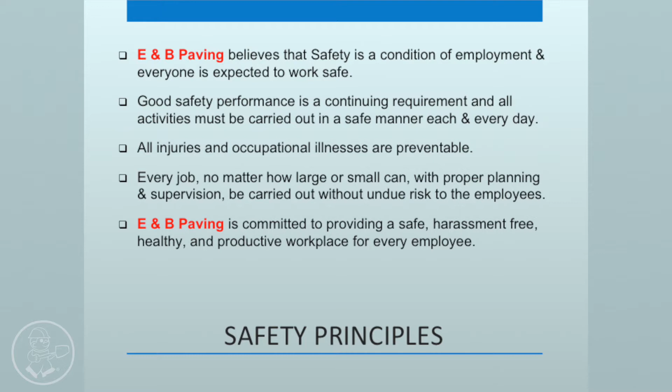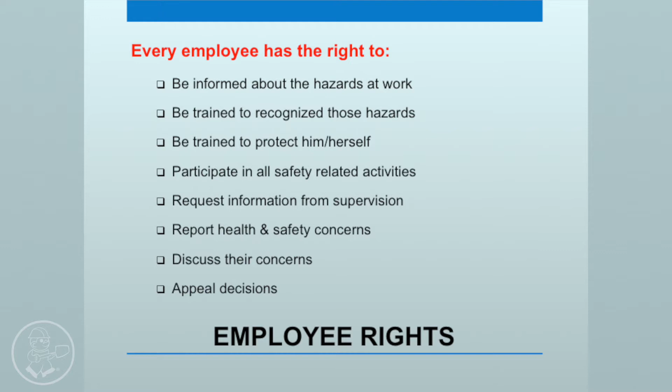We believe that safety is a condition of employment and that everyone has a role to play in providing a safe, harassment-free, healthy, and productive workplace. We have a disciplinary program that includes verbal warnings up to and including termination of employment. All employees have the right to be informed of hazards in their workplace, participate in all safety-related activities, request information, report concerns, discuss those concerns, and appeal decisions of management.

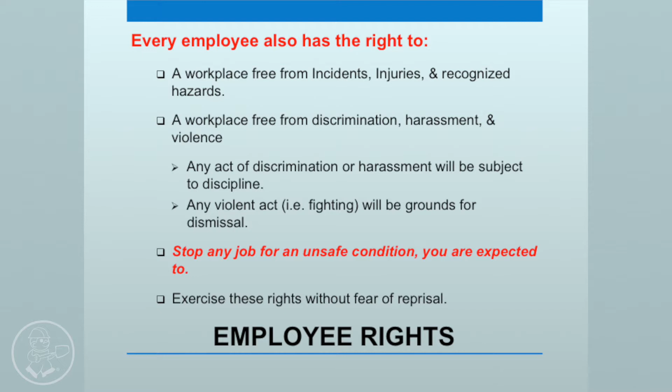E&B Paving has a zero tolerance for discrimination, harassment, and violence within our organization. Each and every employee has the right to report any violations without fear of reprisal. All employees have the right to stop any task that they feel is unsafe to themselves or others. Employees have the responsibility not only for their own safety, but that of their coworkers and the public. All employees are expected to report unsafe conditions or hazards and to report all work-related injuries when they occur, regardless of severity. If an employee is unsure of how to perform a task safely, stop and ask questions.

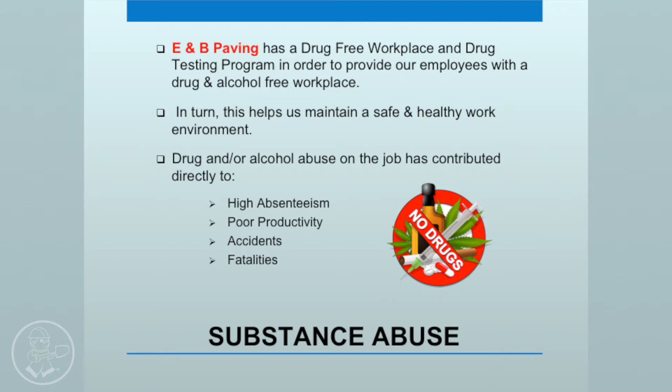We at E&B are committed to providing a drug-free workplace. Drugs and/or alcohol abuse directly correlates to higher absenteeism, poor productivity, incidents, and fatalities. Our drug-free workplace and drug testing policy prohibits any employee from reporting to work under the influence of drugs or alcohol. Our drug testing policy includes testing for the following: pre-employment testing, reasonable suspicion testing, post-incident testing, and random testing.

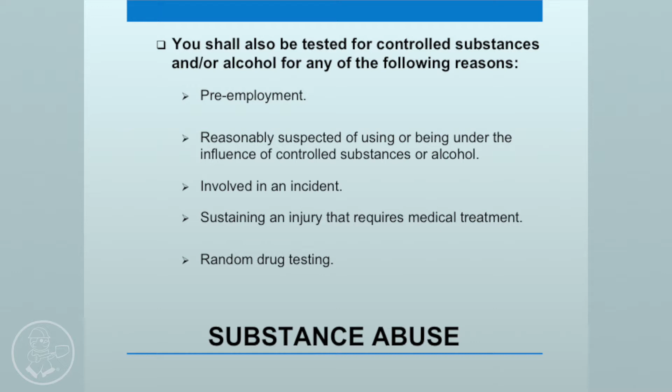Employees who possess specialty training certifications such as CCO, First Aid and CPR, OSHA 10 or 30-hour, Flagger, along with any other required training should provide the company with copies of such certifications for the company records. Toolbox talks will be done on a weekly basis and documented by the foreman. E&B Paving requires that any employee performing flagging operations have a valid flagger certification from either the union or ATSSA, and that a copy of their card be on file with the safety department.

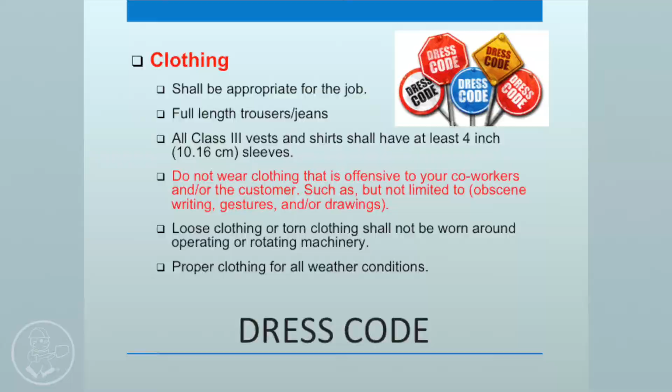We expect our employees to report to work dressed in a professional manner. This includes wearing full-length pants, shirts with a minimum of 4-inch sleeve, leather work boots, and no offensive material on their clothing. We provide employees with all the necessary personal protective equipment, or PPE, for the tasks they are asked to perform. We expect all employees to use the proper PPE for the task and ask for the PPE if they don't have it. ANSI-approved hard hats are required at all times.

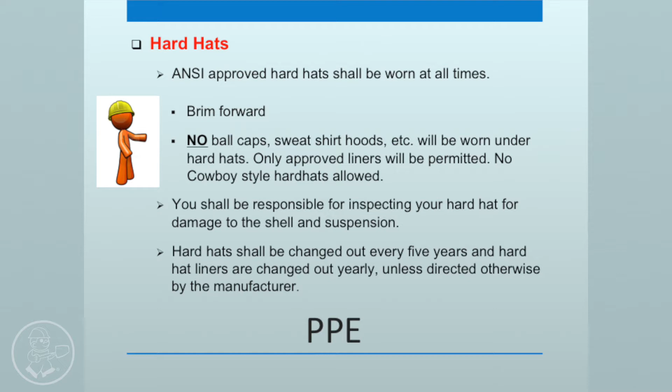Hard hats must be worn brim forward. Hard hats should be inspected for damage and replaced at least every 5 years. The suspension should be inspected for damage and replaced at least every 12 months.

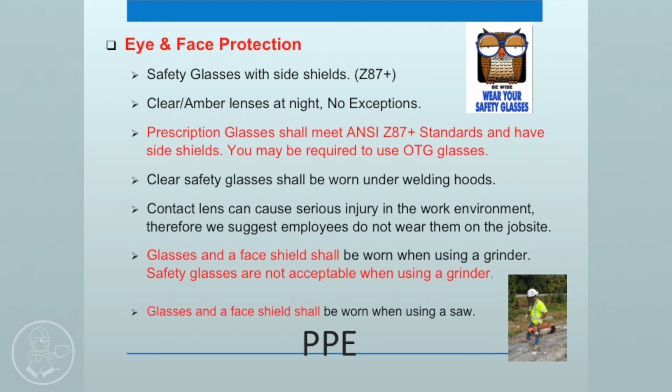Z87 safety glasses are required at all times. Prescription safety glasses must have the Z87 stamp in them and must have side shields. Clear or amber lenses shall only be worn at night. Clear safety glasses shall be worn under welding hoods. When performing tasks that produce flying debris, a face shield must be worn in addition to your safety glasses.

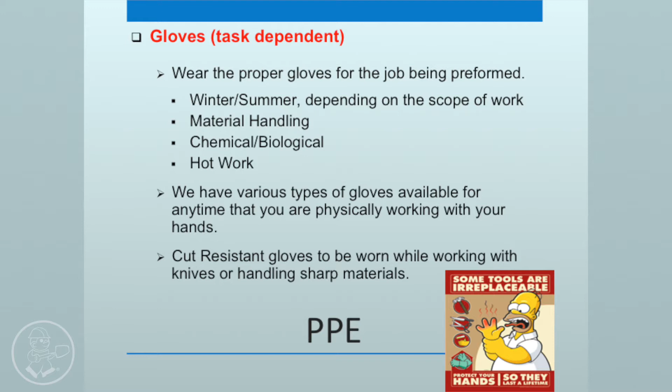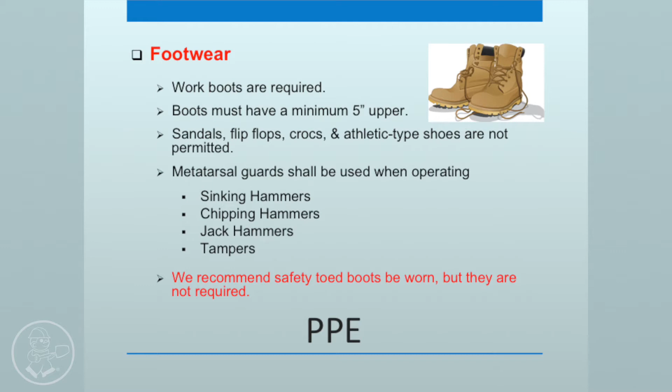Proper gloves should be worn to protect your hands from hazards associated with the task being performed. This could include cut resistance, chemical resistance, and/or leather gloves. Work boots with a minimum 5-inch upper are required at all times. We recommend safety-toed boots be worn but are not required. When operating equipment that could hit their feet, employees are required to have metatarsal guards if their boots are not safety-toed.

ANSI Class 3 safety vests shall be worn at all times. All vests must be zipped to provide the 360-degree amount of reflectivity. Class 3 clothing may be worn in lieu of a safety vest. All vests and/or clothing must be washed or replaced if it becomes soiled or the reflectivity becomes compromised.

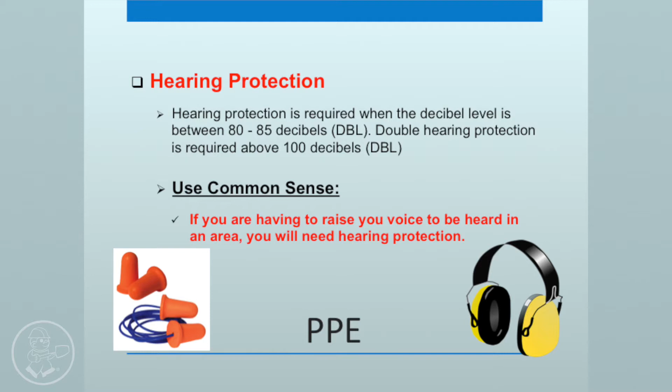Hearing protection is required when the decibel level is between 80 and 85 decibels, and double hearing protection is required above 100 decibels. Only employees who have been medically released by a licensed healthcare professional, have proper training, and have been fit tested will be issued a respirator for activities where air quality cannot be improved by other means. Examples may include lead, asbestos, and silica.

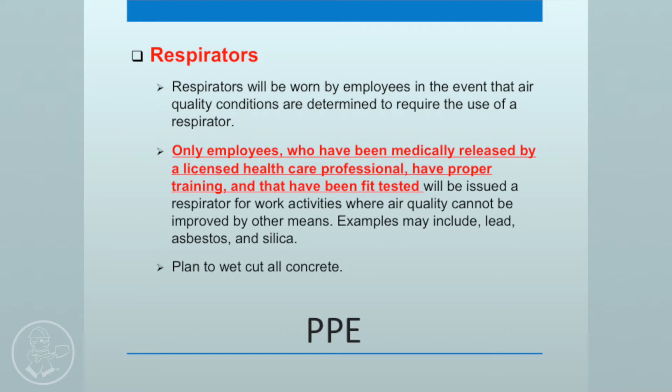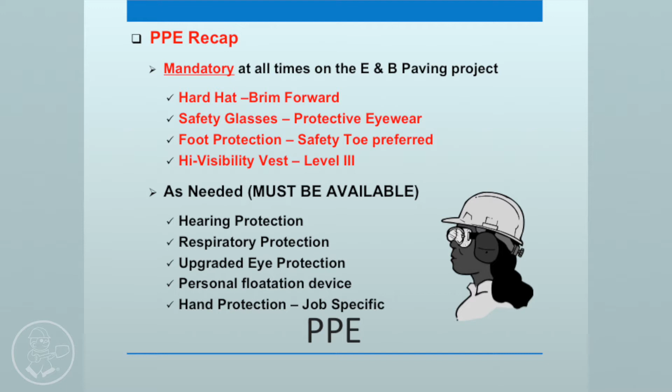Now let's take a moment to do a PPE recap. Mandatory items can include a hard hat, safety glasses, foot protection, and Class 3 visibility. Other items that may be needed could include hearing protection, upgraded eye protection, respiratory protection, and hand protection.

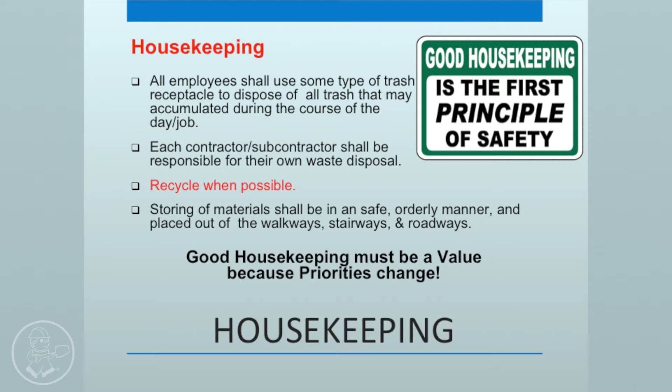It is the responsibility of all employees to help with housekeeping on all of our jobs. Poor housekeeping not only reflects negatively on the professionalism of our company and your crew, but poses a safety hazard to everyone on the project.

All employees should be aware of the slip, trip, and fall hazards around them. Do not carry loads you cannot see over. Keep walking and working surfaces free of debris and slippery substances.

3 points of contact should be used when getting onto or off of equipment. In addition, the employee must face the equipment when mounting or dismounting. All exposed rebar and form pins should be capped at all times.

Employees must be cautious when working around heavy equipment and/or materials to avoid pinch points for their hands and crush points for their bodies. Always be aware of your surroundings and take extra caution not to get between a piece of equipment and a fixed point where you could be caught in or between.

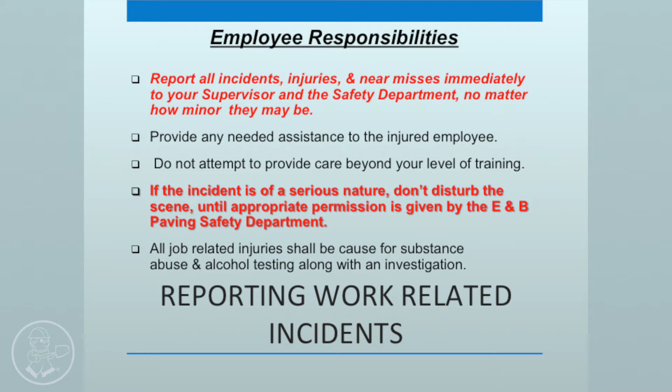Employees are required to report all incidents, injuries, and near misses to their supervisor immediately. It does not matter how minor it may be, or whether the injury requires medical treatment or not. Everything must be reported. If a serious incident occurs, every effort should be made to maintain the scene until documented by the safety department.

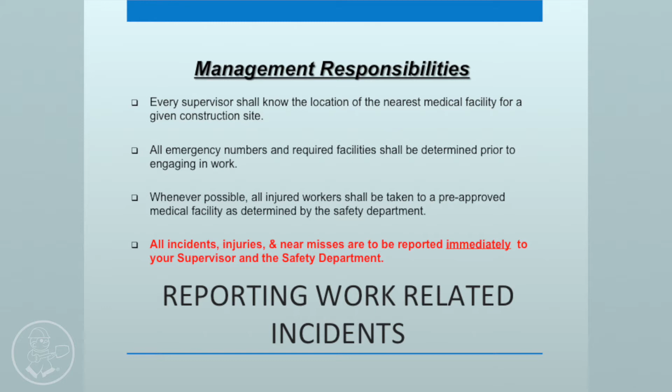All foremen and supervisors shall know the location of the nearest medical facility. Emergency numbers shall be posted on the job site bulletin boards. Unless it is a life or death situation, all injured workers must be treated at a company-approved medical facility. All incidents, injuries, and near misses are to be reported immediately to your supervisor and the safety department.

Pre-job briefings, which could include a job hazard analysis, toolbox talk, or safety huddle, will be conducted by the foreman or supervisor. All employees are required to attend, and participation is key. Foremen and supervisors should use the daily pre-job briefing to discuss the scope of work for the day, identify the known hazards, and what actions or tools should be used to mitigate those hazards.

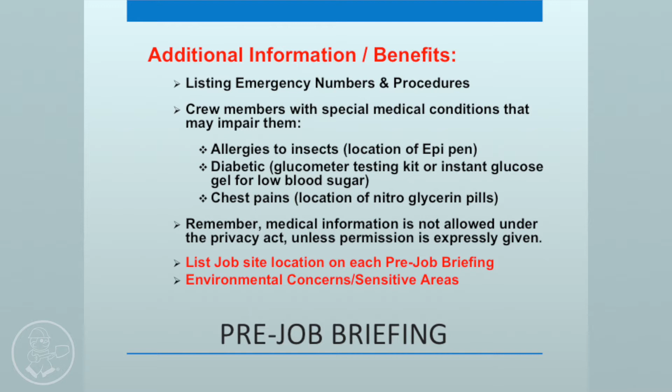Any employee with a medical condition that may incapacitate them and require immediate treatment during their shift, which could include allergies, diabetes, or heart condition, should consider making sure that at least one member of their crew is aware of the condition and the location of any immediate treatment options, which could include an EpiPen, blood sugar testing kit, or nitroglycerin pills.

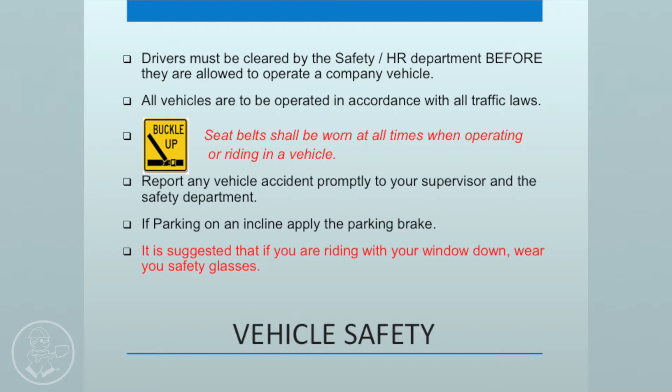Before an employee is allowed to drive any company vehicle, he or she must be cleared by the Human Resources Department. Seatbelt use is required at all times when operating or riding in a vehicle. First aid kits and fire extinguishers shall be available in all foreman's vehicles. Drivers should verify that all loads are secure prior to moving the vehicle.

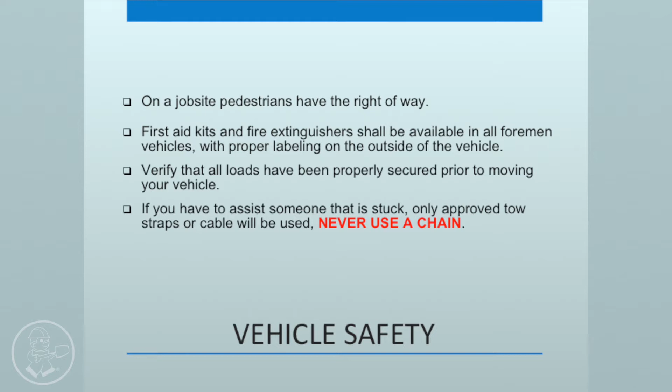Median crossovers are only to be used when both inside lanes are closed to traffic. All vehicles on the job site must have working strobe lights.

Use of cell phones for personal reasons is prohibited while working. Hands-free cell phone use while driving is allowed, and no personal listening devices, such as radios or MP3 players, are allowed while working.

The use of portable electronics for personal reasons is strictly prohibited while actively flagging. Communications with flaggers during active operations should be kept to a minimum and should be related to work activities.

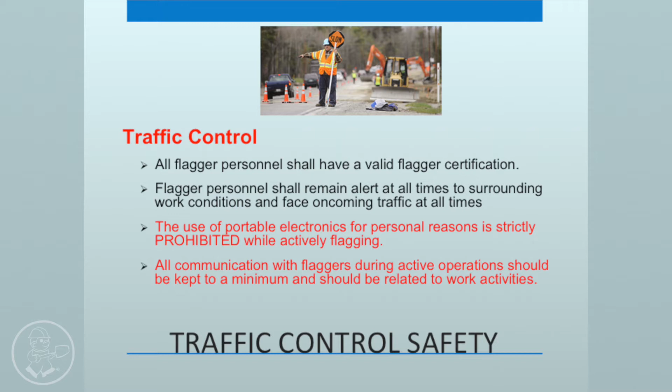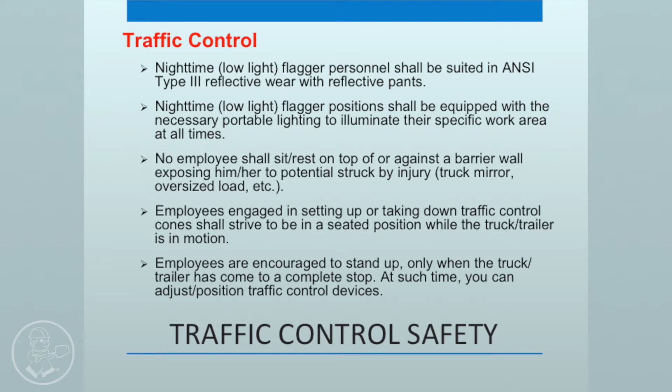For all night work, if not behind a barrier wall, ANSI Type 3 pants or gaiters must be worn by all employees. In addition, reflective tape must be on all hard hats. Employees are not allowed to sit or rest on top of or against a barrier wall while next to live traffic.

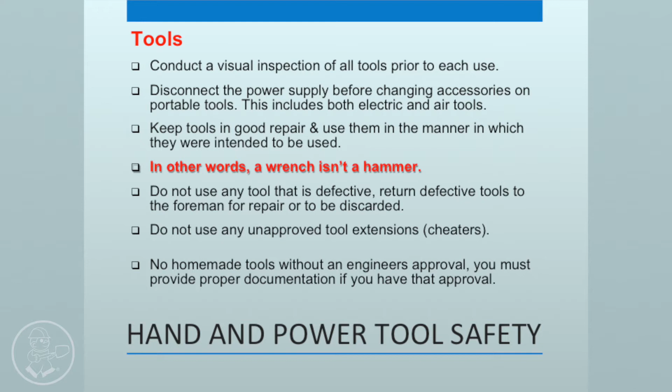All hand and power tools must be inspected before use. If defective, they must be repaired before they are used again. If immediate repair is not possible, they must be tagged out of service until repair can be made. When working above walking and working surfaces, all tools should be in a holder or secured from displacement.

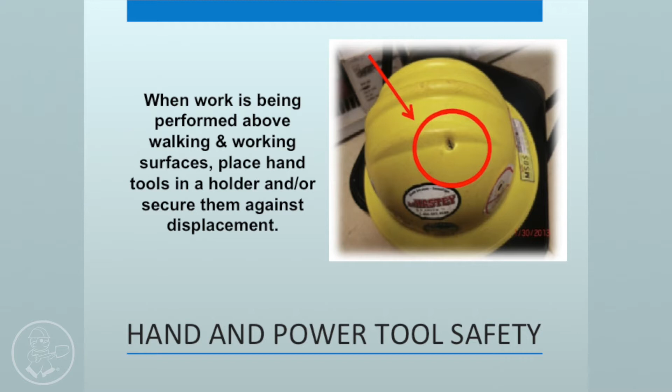Guards should never be removed from power tools. If you find a power tool without a guard, tag it out of service and report it to your foreman. Remember, you must always wear the proper PPE for the tool you are using. Any employee using a grinder must have a face shield in addition to their safety glasses.

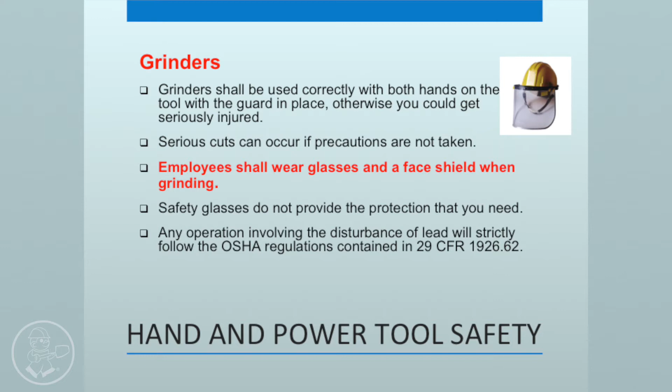Fall protection is required when working at a height of 6 feet or more, or 4 feet at fixed plant locations. Guardrail systems should be used when possible to mitigate the fall hazard. When a guardrail system isn't feasible, employees must use 100% fall arrest systems.

This shall consist of a full body harness, retractable fall limiter, and an anchor point rated for 5,000 pounds per person. If using a standard lanyard, you must consider the total fall distance, including the height of the employee, the deceleration distance of the lanyard, and a 3-foot safety factor. The use of retractable fall limiters is preferred.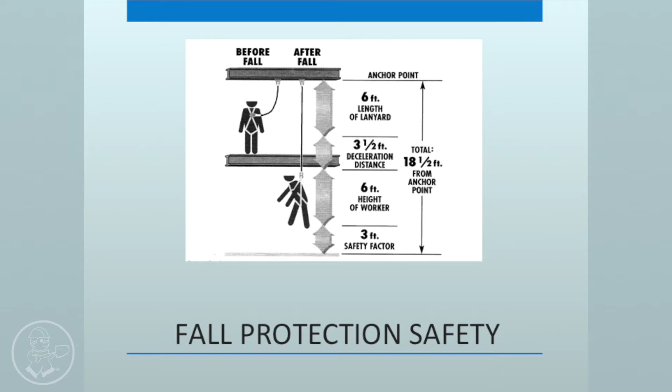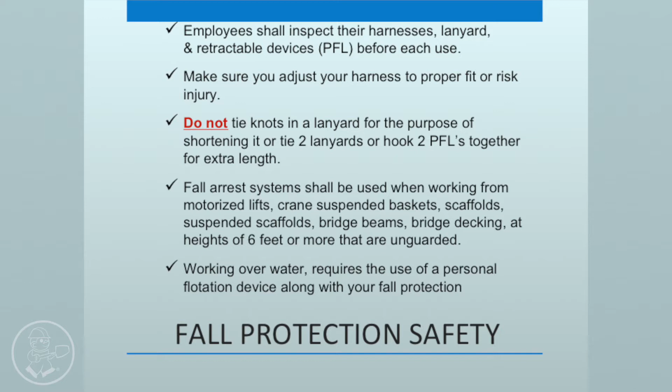All personal fall arrest systems must be inspected by the employee before use. All harnesses should be adjusted for proper fit. Employees must have 100% fall protection at all times.

Motorized equipment should be used as a last resort. When used in this manner, the engine should be turned off, the parking brake set, and the key should be in the possession of the employee using the equipment as an anchor point.

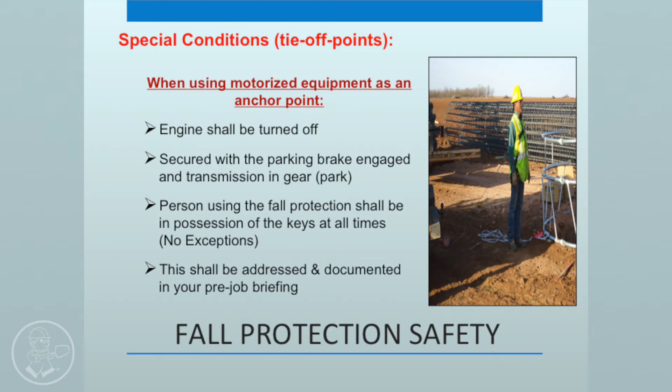An employee required to enter a confined space or act as an attendant for a confined space entry must be trained in confined space entry before they are allowed to perform the task. For confined space requiring a permit, the permit is only valid until the end of that shift, and it must be replaced with a new permit each shift.

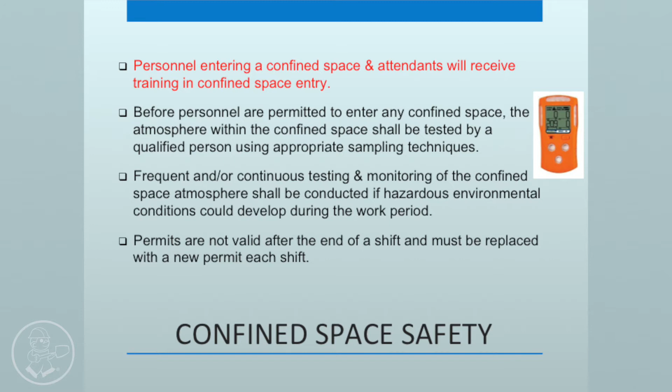Testing of the air quality in a confined space must be performed before entry, after lunch period and after an extended period of being out of the confined space. Attendants are to perform no other tasks. Warning signs or devices shall be posted to keep unauthorized personnel out.

For all excavation activities of 5 feet or more, a competent person must be on site. All hazards associated with the excavation must be covered on the pre-job briefing with all employees who could be exposed to the hazards. All spoil piles must be kept at least 2 feet from the edge.

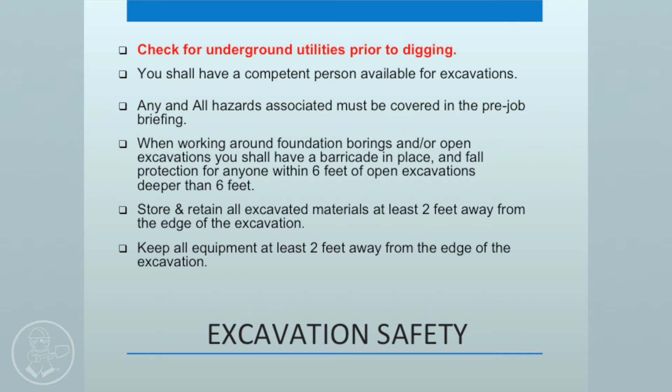Any excavation 20 feet or more must be designed by a professional engineer. Some type of protection system, which could include benching, sloping, shoring, or trench boxes, are required for all excavations 5 feet or greater. All excavations must be kept free from water.

Safe means of ingress and egress, which could include a ladder or steps, is required for all excavations over 4 feet and must be provided every 25 feet. Barricades, warning lights, shall be placed around unattended excavations.

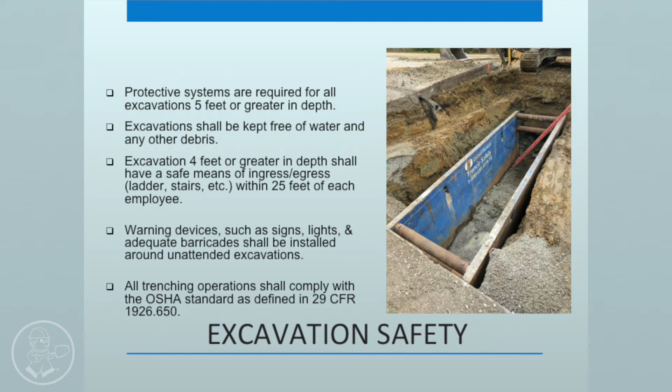All ladders must be inspected before use. Always use 3 points of contact on a ladder. All straight or extension ladders must have safety feet and be secured when in use. Never use a step ladder as a straight ladder.

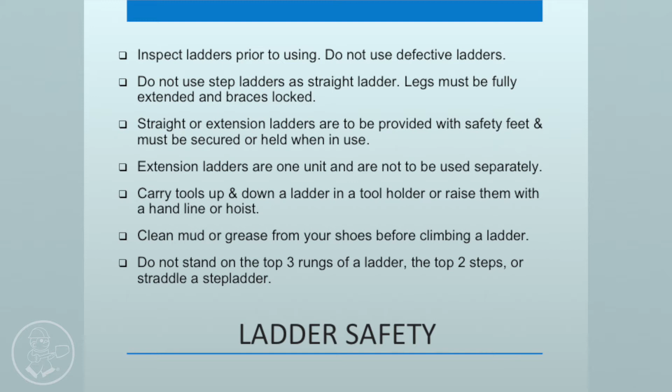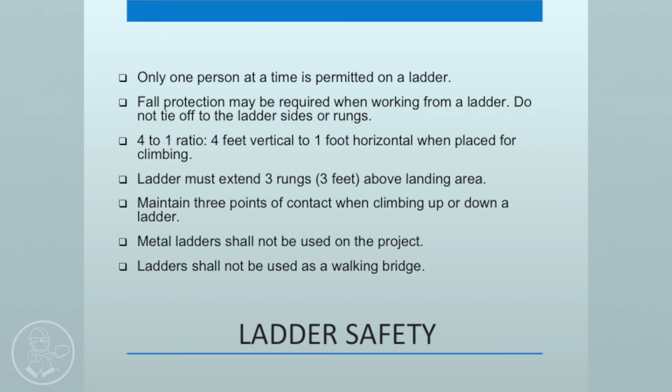All step ladders must have legs fully extended and braces in the locked position. Only one person at a time may be permitted on the ladder. Metal ladders are not allowed. A ladder must extend 3 feet above the landing area. A 4-to-1 ratio should be used when placing a ladder for climbing.

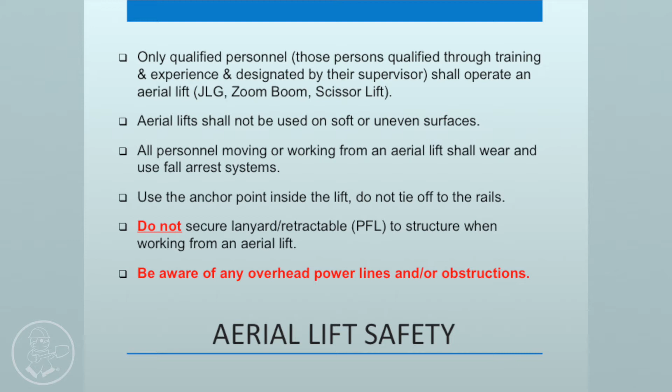Only employees who have been through the E&B aerial lift safety training shall work from or operate an aerial lift. Employees working from an aerial lift must be tied off. Be aware of overhead power lines or other obstructions while working on an aerial lift. A pre-shift inspection must be conducted prior to using the lift.

The inspection booklet must stay in the equipment. No hoisting materials with the lift. Employees must stay in the basket. No climbing, sitting on, or working from the rails.

Only qualified employees shall be allowed to work on electrical equipment. All cords and welding leads shall be inspected before each use. GFCIs are required on all extension cords and portable power tools.

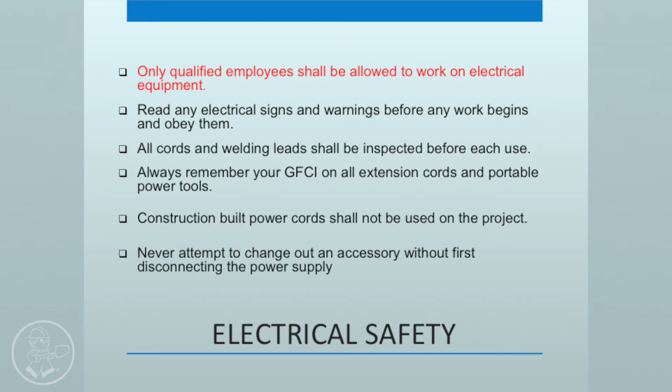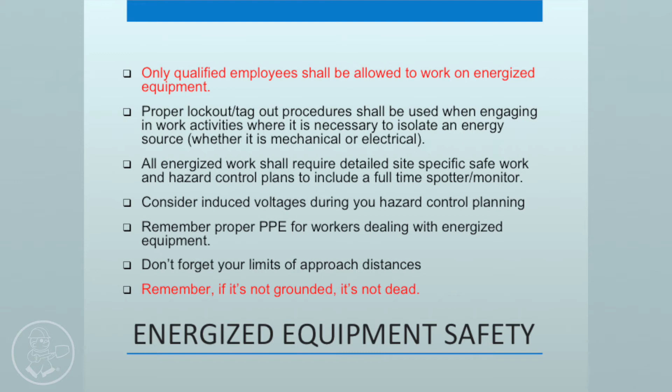Always use proper lockout and tagout procedures when working on an energy source. This could be mechanical or electrical. Remember, if it's not grounded, it's not dead.

Always keep the minimum distance from all power lines. Work should not be performed closer than 10 feet from any power line. Foremen and supervisors should identify all overhead power lines in relation to the day's work activity. Make sure the overhead power line signage is in place.

Use spotters when crossing under overhead power lines with equipment. All employees must stay clear of any piece of equipment or vehicle that comes in contact with an overhead power line. The current can flow through the ground in a ripple effect and pose a hazard to employees on the ground. All booms and buckets shall be in the stow position when crossing under overhead power lines.

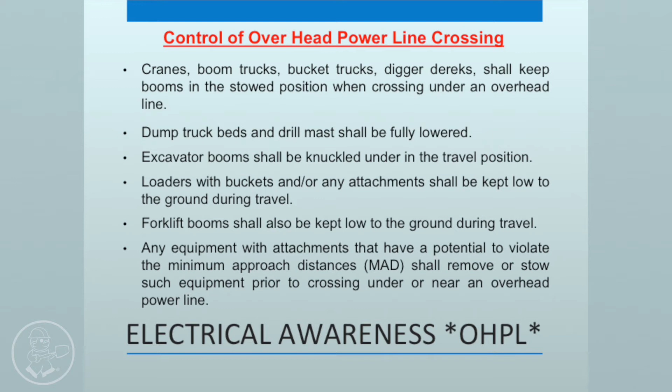Any equipment with attachments that have the potential to violate the minimum approach distances shall remove or stow such equipment prior to crossing under or near an overhead power line.

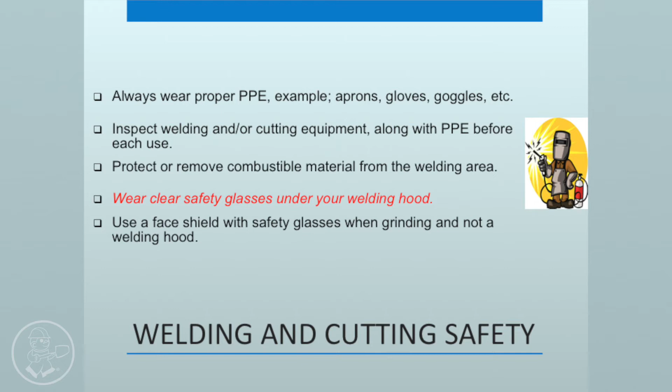All appropriate PPE must be worn when performing welding or cutting tasks. All equipment and PPE must be inspected before each use. All combustible materials should be removed from the welding area, and if this is not possible, then a fire extinguisher and a fire watch should be immediately available and remain 30 minutes after the activities have ended. Always wear clear safety glasses under your welding hood.

All hoses must have a flashback arrestor at the regulator end. When in use, cylinders shall be on an appropriate cart and always be in the upright position. When not in use, all cylinders shall be stored upright, caps in place, and secured with a chain. Oxygen and acetylene cylinders must be stored at least 20 feet apart, and this goes for both full and empty cylinders.

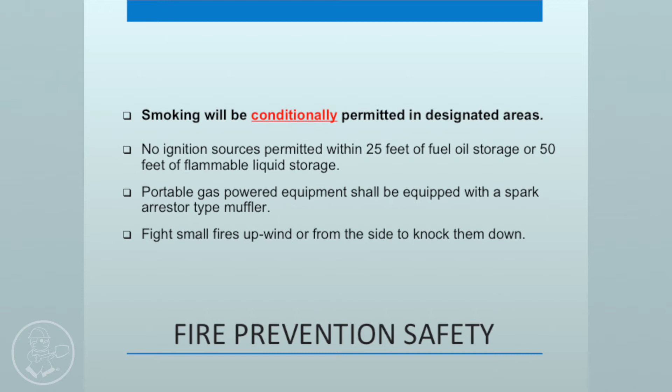No smoking or ignition source is allowed within 25 feet of fuel oil storage or 50 feet from flammable liquid storage. All fires, no matter what size, must be reported to the safety department immediately.

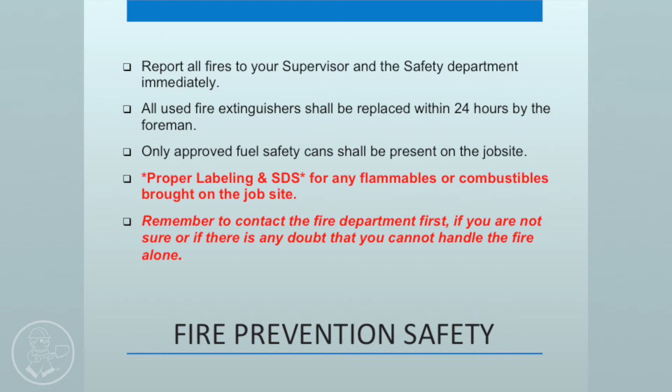If a fire extinguisher is used, it must be replaced within 24 hours. Pull the pin, aim the nozzle at the base of the fire, squeeze the handle, sweep the nozzle back and forth at the base of the fire, moving from the front to the back. If you can't put out a fire with one fire extinguisher, get out and call the fire department.

Only employees having completed the E&B Paving forklift safety training are authorized to operate a forklift. Pre-shift inspections must be completed before each use, and the pre-shift inspection booklet must remain in the forklift. All forklifts must have a legible load chart available for the operator.

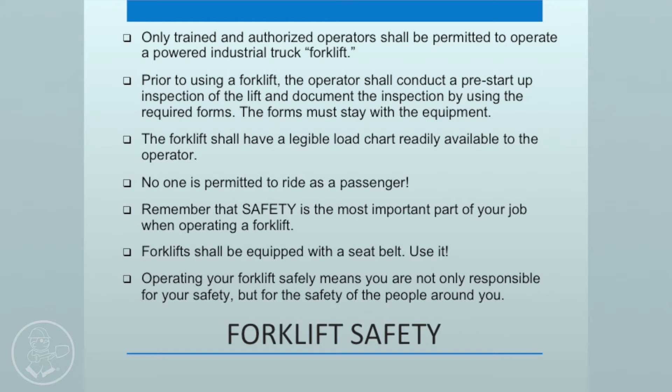No moving of employees on forklifts. Seat belt use is mandatory. Always travel with the forks in the lowest point that allow good visibility. Remember to grip the wheel securely and brace yourself with your feet if the forklift starts to tip over. Never jump off of the forklift.

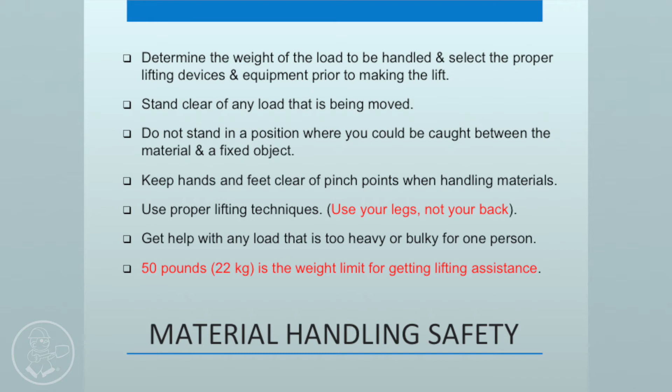Always determine the weight of a load and use the proper device and/or equipment for the size. Never walk under or allow anyone else to walk under a raised load. Keep hands and feet clear of pinch points when handling materials. Lift with your legs, not your back, and get help with any load over 50 pounds that can't be lifted mechanically.

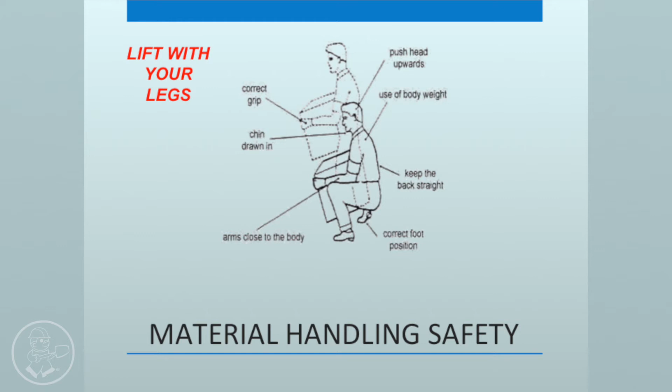A qualified rigger must be present for all lifts. Inspect all rigging equipment prior to each use. Remove all damaged rigging and hoisting equipment from service and tag out until repaired or destroyed. Safety latches and positive locking devices shall be used while rigging and hoisting. Remove defective rigging and hoisting equipment.

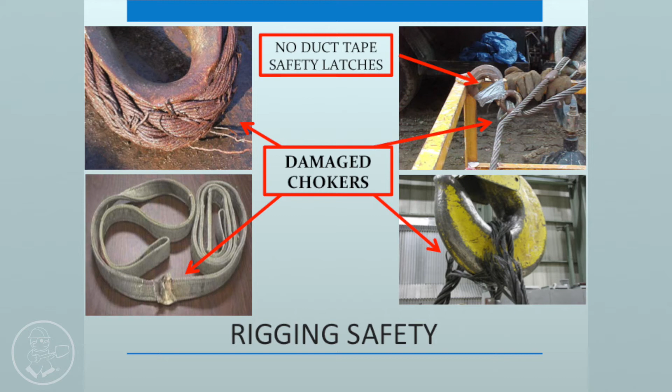Do not attempt to make a lift unless the hoist rope and rigging are free of kinks and twists. Center the hook over the load in such a manner as to prevent swinging. Always inspect your rigging before each use and document your inspection. Do not make any side pull.

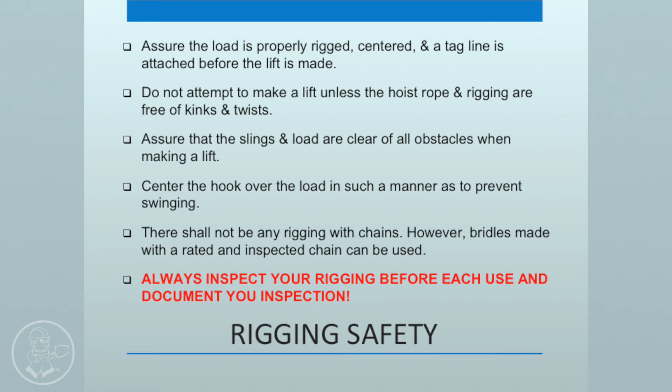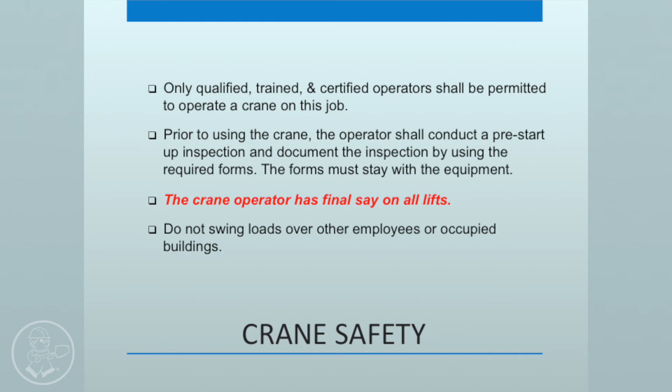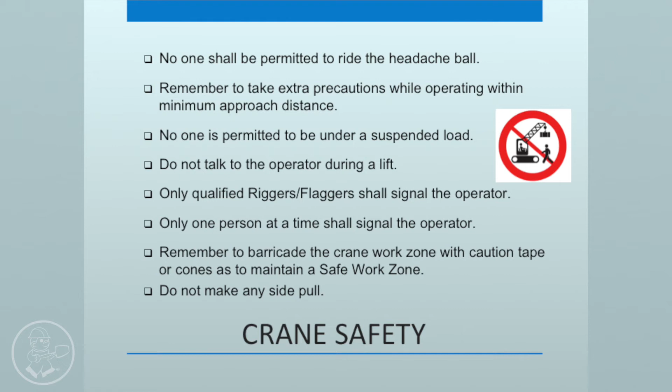E&B Paving requires that all crane operators have a CCO certification. Pre-shift inspections are required and the forms must stay with the equipment. The crane operator has final say on all lifts. No one is permitted to be under a suspended load. Only qualified signal persons shall signal the operator. All swing radiuses should be barricaded.

Operators must be qualified to operate a piece of equipment and must inspect the equipment before each use. Seat belts are required in equipment with a cab or rollover protection. Always face your equipment and use 3 points of contact when climbing onto or off of the machine. Hard hat use is mandatory in open cab equipment. Never allow anyone to ride on your equipment unless it is designed for that purpose. Keep the equipment free of debris.

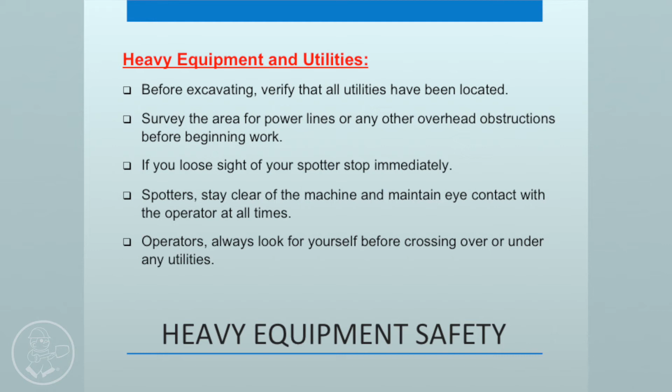Backup alarms and strobes must be in good working order when required. Use a spotter if backing with limited visibility. Survey the area for power lines or any other overhead obstruction before beginning work. If you lose sight of your spotter, stop immediately. Spotters, stay clear of the machine and maintain eye contact with the operator at all times.

During fueling operations, the equipment must be shut down with a bucket or blade on the ground and secured. Anyone dispensing fuel must wear the appropriate PPE. All spills, large or small, shall be reported to the supervisor and safety department immediately.

The globally harmonized system of classification and labeling of chemicals, or GHS, provides for uniform guidance on safety data sheets, or SDSs, for all chemicals. E&B Paving has all SDSs readily available on its company website. All employees must be informed of how to access the online SDSs. All containers must be labeled with what the contents are.

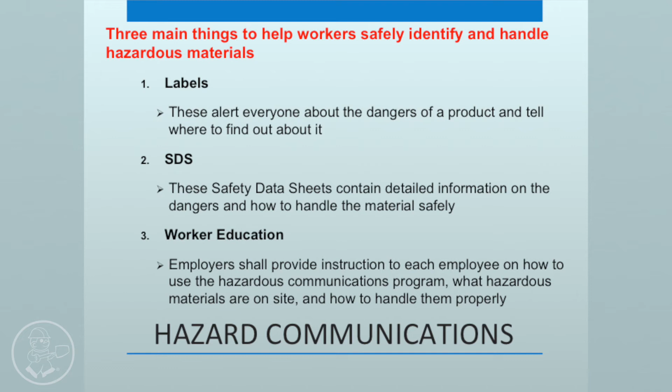You have the right to know what chemicals you are working with or exposed to in the work environment. Everyone working with or around hazardous materials has the right and responsibility to know the hazards and the proper safe work procedures for all hazardous materials being used or produced in their work area.

Bloodborne pathogens are substances carried by the blood or other bodily fluids that cause illness or injury to the body. Many viruses and bacteria are bloodborne. Some common ones are hepatitis B, hepatitis C, and HIV.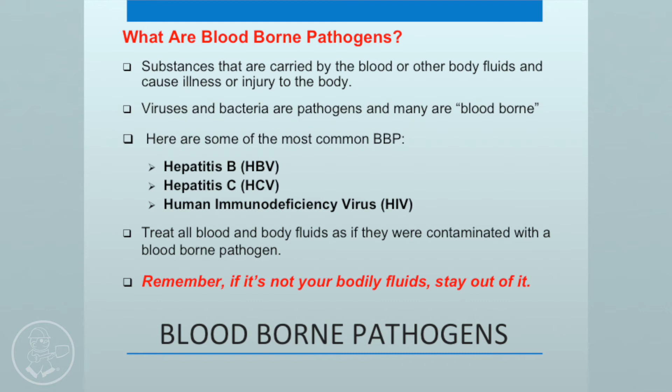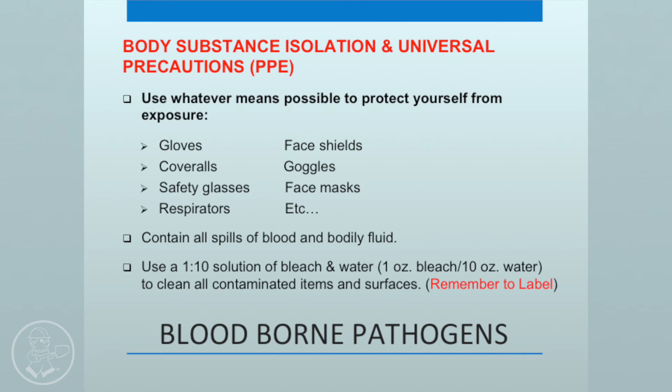Always treat blood and body fluids as if they are contaminated, because you don't know if they are. Remember, if it's not your body fluid, stay out of it. All foremen and above have CPR and first aid training and have the necessary PPE to deal with body fluids.

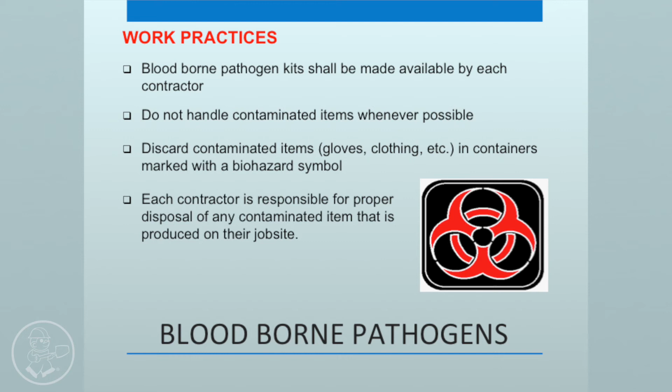Only trained employees should deal with blood or body fluids. Do not handle contaminated items whenever possible. Discard contaminated items, including gloves or clothing, in containers marked with biohazard symbols. Keep your hands out of your mouth, nose, eyes, ears, and or any other opening in your body.

Wash your hands each time you remove your medical gloves and as frequently as possible. Do not let contaminants come in contact with any open cut or wound. Hand sanitizers are also recommended.

Each crew shall have at least one person that is first aid and CPR trained with access to a first aid kit at all times. Injuries requiring treatment beyond first aid shall be accompanied to the healthcare facility by a safety person or a company representative. Report injuries immediately to a supervisor and the E&B Paving Safety Department regardless of severity.

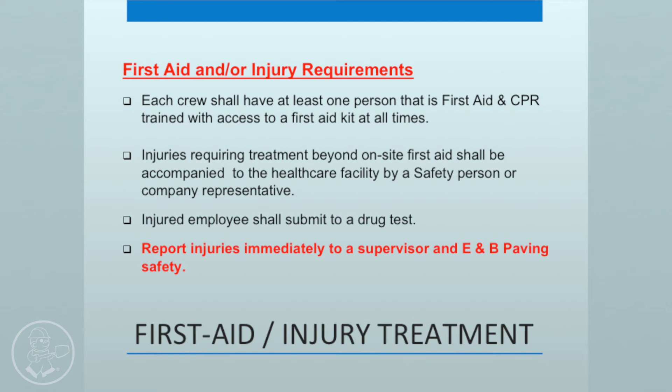Weather shall be monitored by construction supervisors and the contractor safety professional on site. Evacuation decisions shall be made with enough time to safely shut down, secure, and move personnel along with equipment to the closest safe zone. Threat of violence response.

Do not escalate. Diffuse the situation to the best of your abilities with no arguing. Look for an opportunity to back away. Ask for an opportunity to go and get your supervisor. Notify your supervision and or local authorities if weapons are present or if there is a serious threat of violence. Protect yourself above all else.

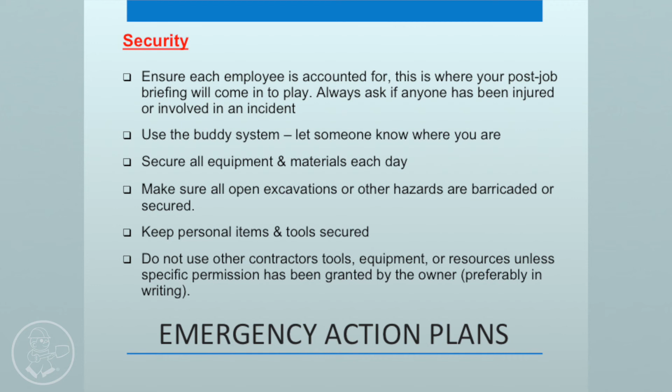No guns or weapons allowed on the worksite. Security: use the buddy system. Let someone know where you are. Secure all equipment and materials each day. Make sure all open excavations or other hazards are barricaded and secured. Keep personal items and tools secured.

Cold-related emergencies. Hypothermia occurs from prolonged exposure to cold air and or water. This condition may result in serious bodily harm or even death. Smart planning, such as layering clothing, waterproof boots and gloves, may give you an advantage against hypothermia.

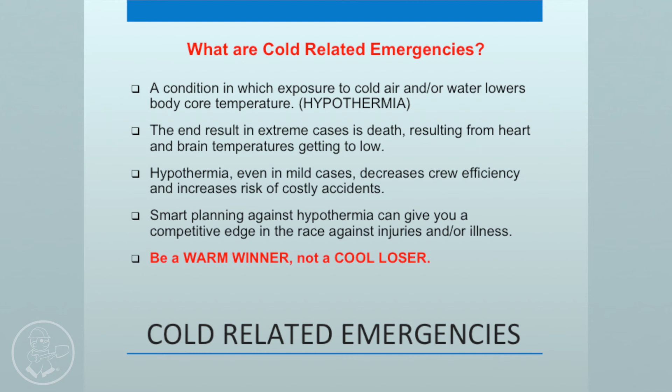Symptoms of hypothermia may include shivering, vague, slow, slurred speech, memory lapses, incoherence, abnormal behavior, immobile or fumbling hands, undue stumbling or lurching gait, drowsiness, exhaustion, being too tired to get up after a rest, and unnoticed loss of clothing such as a hat or gloves.

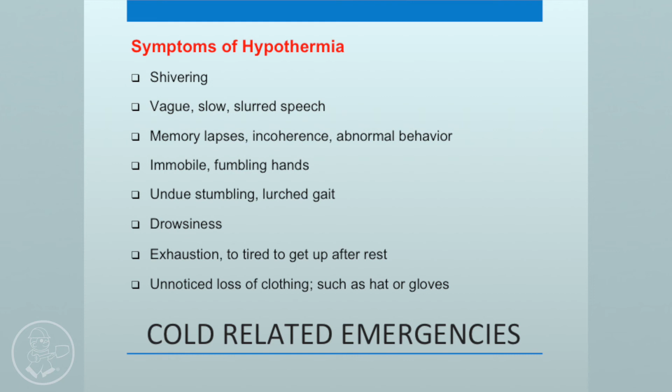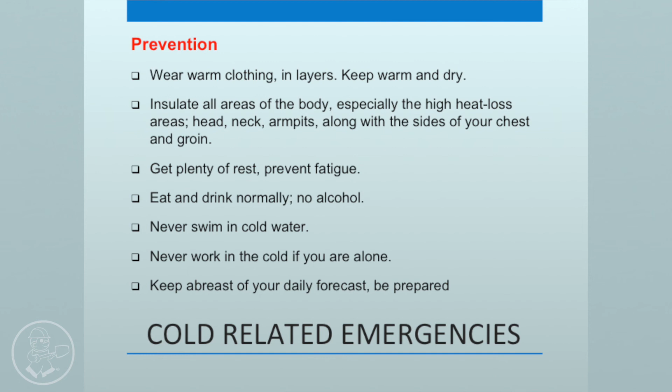Prevention of hypothermia: wear warm clothing and dress in layers. Keep clothing dry. Insulate all areas of the body, especially high heat loss areas such as the head, neck, armpits, side of chest, and groin. Refrain from alcohol use the night before a shift.

A heat-related emergency is the body's way of saying it is having a hard time maintaining a normal temperature. The heart pumps faster and blood is diverted from the organs to the skin. Sweating increases and the person may begin to experience heat cramps, heat exhaustion, and finally heat stroke. Just because a person's clothes or skin are dry does not mean they are not sweating.

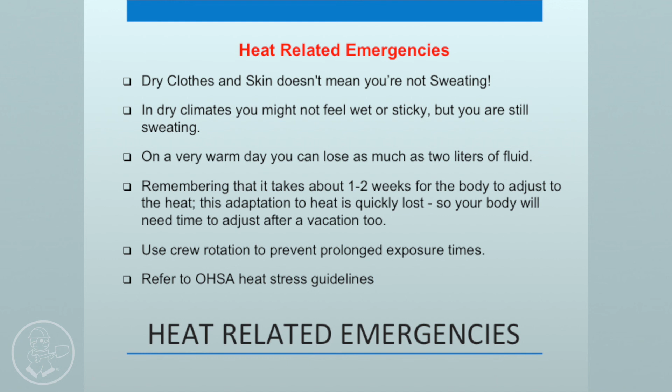It takes the body about 2 weeks to adjust to heat. Employees should continually take in fluids, water or Gatorade, throughout their shift to guard against heat-related emergencies. Remember, your body needs electrolytes, so if you're only drinking water, you could still have a heat-related emergency. Switch on and off with a drink mix such as Gatorade that will replenish your electrolytes.

Review: each crew shall have at least one member first aid trained. No guns, explosives, open fires, or fireworks are allowed. No roughhousing, practical jokes, and no gambling.

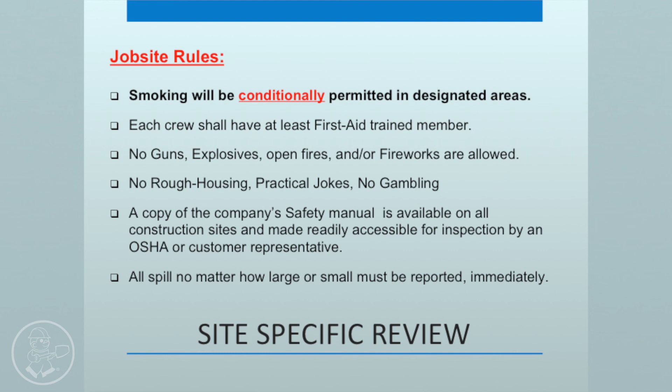All spills, no matter how large or small, must be reported immediately. Have a fire extinguisher immediately available when refueling. Report all incidents, injuries, and near misses immediately to your supervision and the safety department. 100% fall protection is required anytime you are above 6 feet, and 4 feet for fixed plant locations.

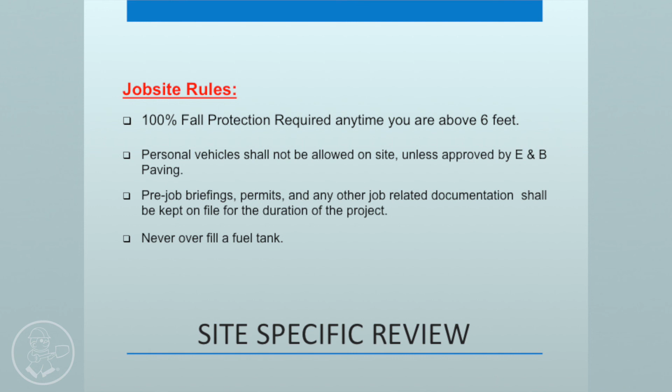Personal vehicles shall not be allowed on site unless approved by E&B Paving. Never overfill a fuel tank. Remember to always be aware of overhead power lines. Get out of the vehicle or equipment, look for yourself, and use a spotter.

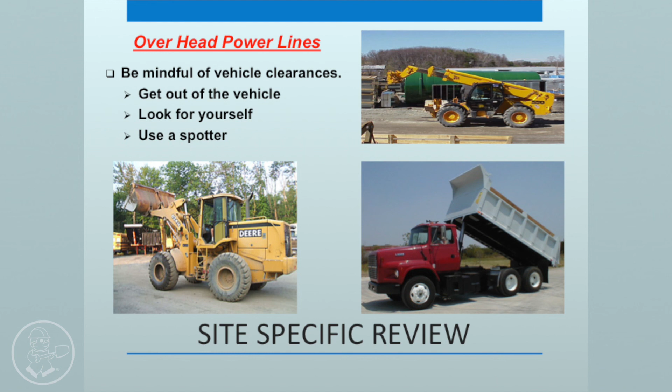At E&B Paving, we place a high value on the safety and well-being of our workforce. We are committed to being incident and injury-free every hour, every day. And once again, welcome to E&B Paving.